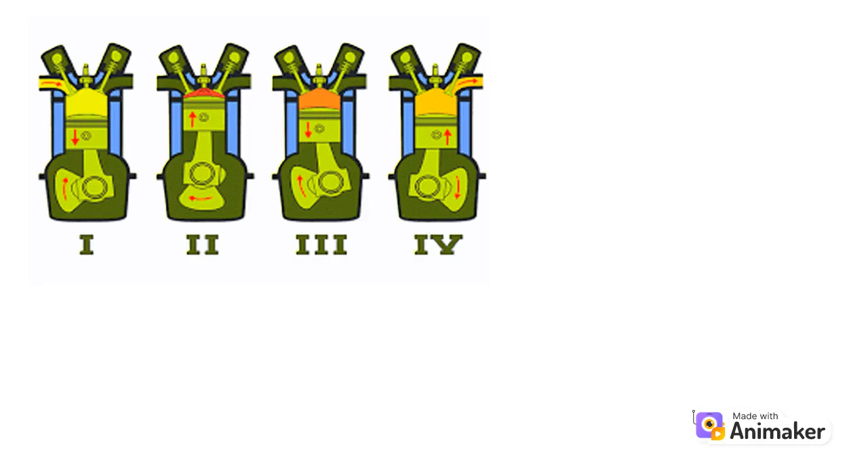Also known as four-cycle, this is an internal combustion engine in which the piston completes four separate strokes, which comprise a single thermodynamic cycle. A stroke refers to the full travel of the piston along the cylinder in either direction. The four separate strokes are termed intake, compression, power, and exhaust.

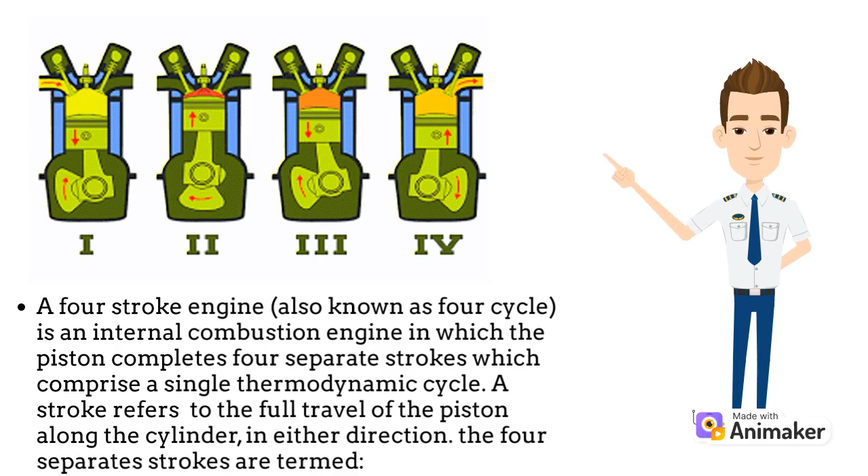The intake stroke of the piston begins at top dead center. The piston descends from the top of the cylinder to the bottom, increasing the volume of the cylinder. A mixture of fuel and air is forced by atmospheric or greater pressure into the cylinder through the intake port.

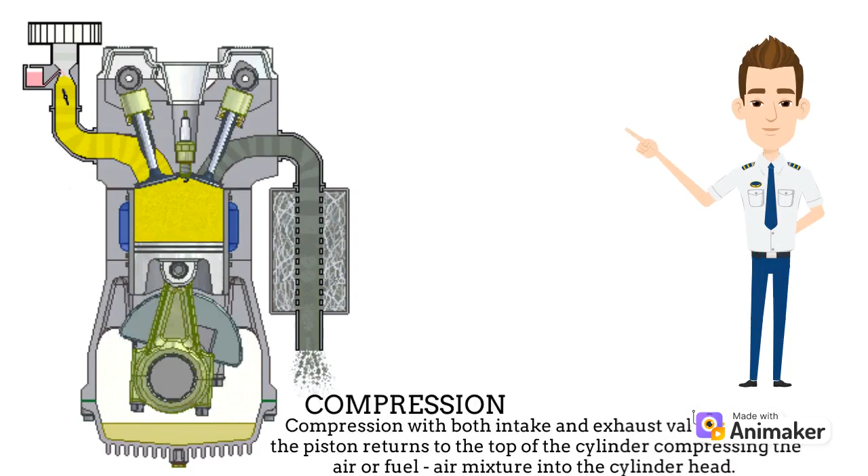Compression: with both intake and exhaust valves closed, the piston returns to the top of the cylinder, compressing the air-fuel mixture into the cylinder head.

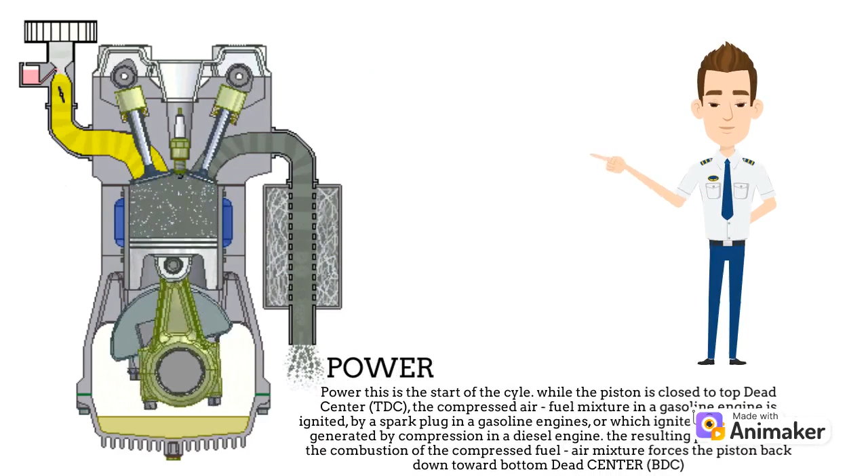Power: this is the start of the second revolution of the cycle. While the piston is close to top dead center (TDC), the compressed air-fuel mixture in a gasoline engine is ignited by a spark plug, or ignites due to the heat generated by compression in a diesel engine. The resulting pressure from combustion of the compressed fuel-air mixture forces the piston back down toward bottom dead center (BDC).

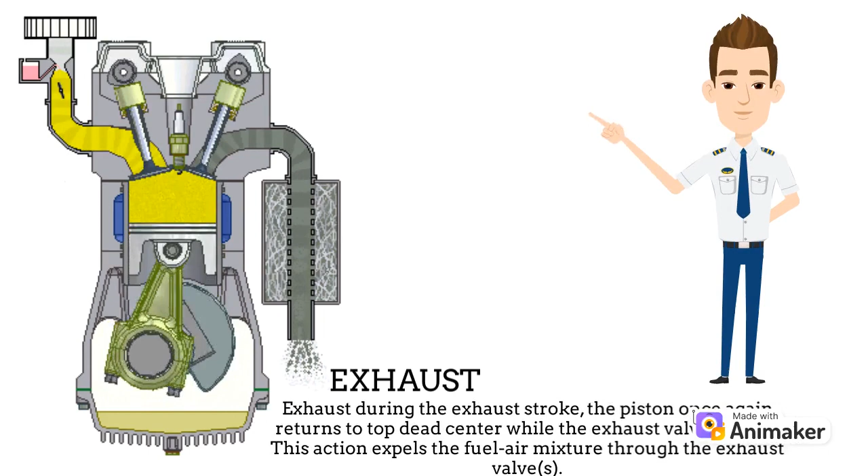Exhaust: during the exhaust stroke, the piston once again returns to top dead center while the exhaust valve is open. This action expels the spent fuel-air mixture through the exhaust valves.

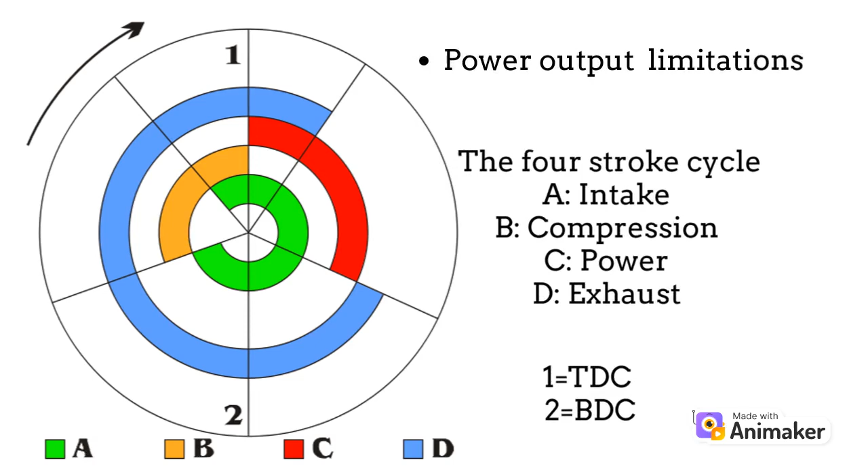Power output limitations. The four-stroke cycle: A intake, B compression, C power, D exhaust. The maximum amount of power generated by an engine is determined by the maximum amount of air ingested.

The amount of power generated by a piston engine is related to its size, cylinder volume, whether it is a two-stroke or four-stroke design, volumetric efficiency losses, air-to-fuel ratio, the calorific value of the fuel, oxygen content of the air, and speed (RPM). The speed is ultimately limited by material strength and lubrication.

Valves, pistons and connecting rods suffer severe acceleration forces. At high engine speed, physical breakage and piston ring flutter can occur, resulting in power loss or even engine destruction.

Piston ring flutter occurs when rings oscillate vertically within the piston grooves they reside in. Ring flutter compromises the seal between the ring and the cylinder wall, which causes a loss of cylinder pressure and power if an engine spins too quickly.

Valve springs cannot act quickly enough to close the valves. This is commonly referred to as valve float, and it can result in piston-to-valve contact, severely damaging the engine. At high speeds, the lubrication of the piston-cylinder wall interface tends to break down, which limits piston speed for industrial engines to about 10 meters per second.

Intake and exhaust port flow: the output power of an engine is dependent on the ability of the intake air-fuel mixture and exhaust matter to move quickly through the valve ports, typically located in the cylinder head.

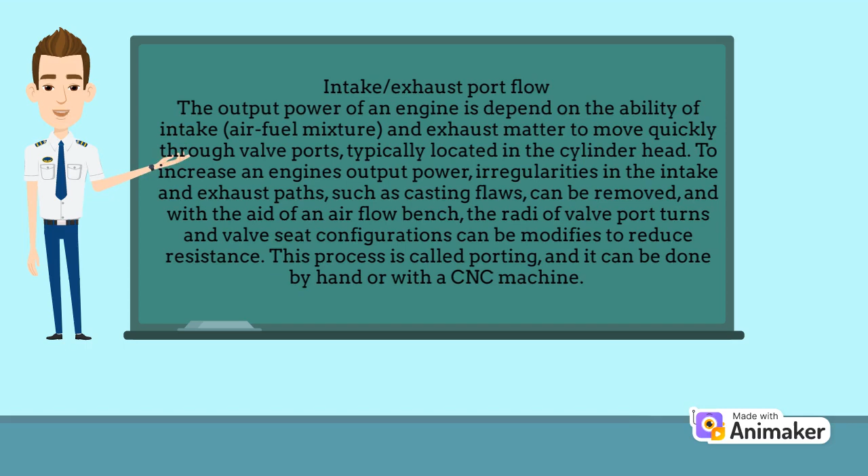To increase an engine's output power, irregularities in the intake and exhaust paths, such as casting flaws, can be removed. With the aid of an airflow bench, the radii, valve port turns, and valve seat configuration can be modified to reduce resistance. This process is called porting, and it can be done by hand or with a CNC machine.

Supercharging: one way to increase engine power is to force more air into the cylinder so that more power can be produced from each power stroke.

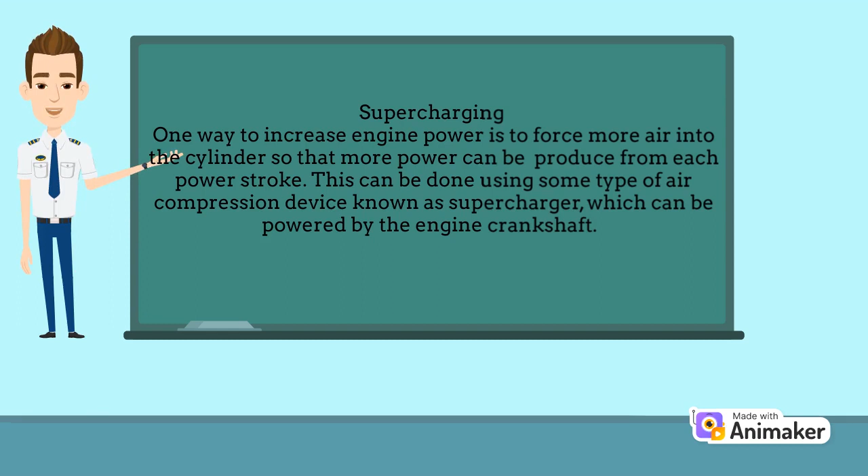This can be done using some type of air compression device known as a supercharger, which can be powered by the engine crankshaft. Supercharging increases the power output limits of an internal combustion engine relative to its displacement.

Most commonly, the supercharger is always running, but there have been designs that allow it to be cut out or run at varying speeds relative to engine speed.

Mechanically driven supercharging has the disadvantage that some of the output power is used to drive the supercharger, while power is wasted in the high-pressure exhaust, as the air has been compressed twice and gains more potential volume in the combustion, but it is only expanded in one stage.

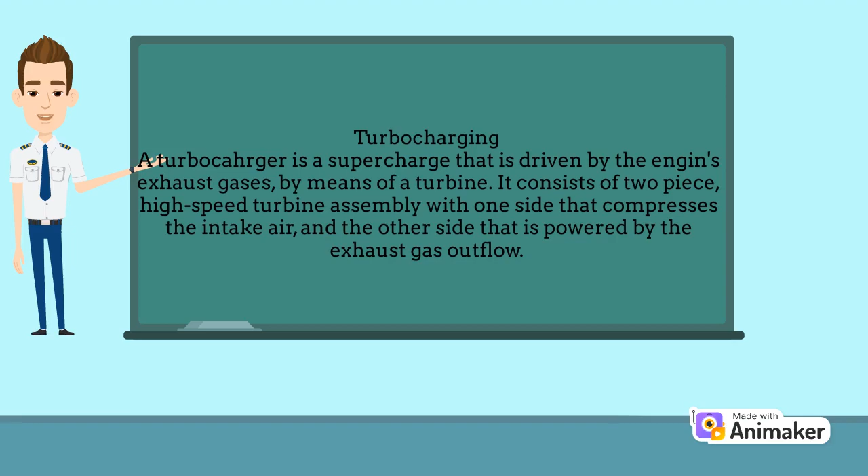Turbocharging: a turbocharger is a supercharger that is driven by the engine's exhaust gases by means of a turbine. It consists of a two-piece, high-speed turbine assembly, with one side compressing the intake air and the other side powered by the exhaust gas outflow.

When idling, and at low to moderate speeds, the turbine produces little power from the small exhaust volume. The turbocharger has little effect, and the engine operates nearly in a naturally aspirated manner.

When much more power output is required, the engine speed and throttle opening are increased until the exhaust gases are sufficient to spin up the turbocharger's turbine, starting to compress much more air than normal into the intake manifold.

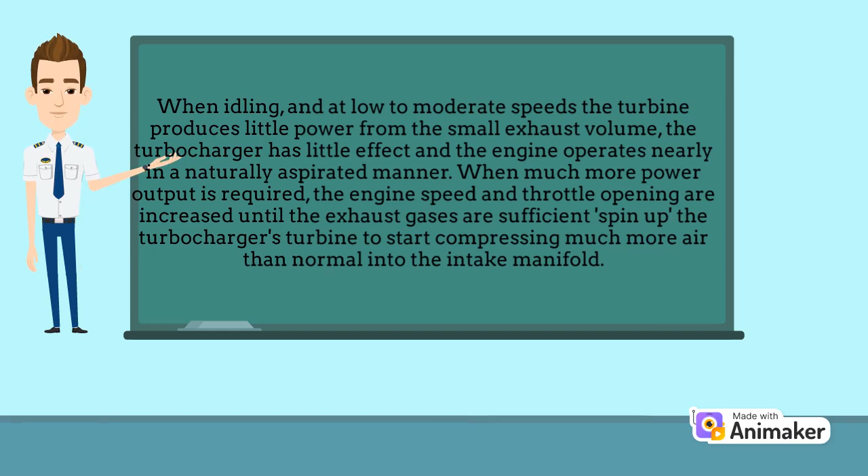Turbocharging allows for more efficient engine operation because it is driven by exhaust pressure that would otherwise be mostly wasted. But there is a design limitation known as turbo lag.

The increased engine power is not immediately available due to the need to sharply increase engine RPM, to build up pressure and to spin up the turbo, before the turbo starts to do any useful work. Increased exhaust spins the turbo faster, and so forth until steady high power operation is reached.

Another difficulty is the higher exhaust pressure causes the exhaust gas to transfer more of its heat to the mechanical parts of the engine.

Rod and piston to stroke ratio. The rod to stroke is the ratio of the connecting rod to the length of the piston stroke. A longer rod reduces sidewise pressure of the piston on the cylinder wall and the stress forces, increasing engine life. It also increases the cost and the engine height and weight.

An engine where the bore diameter is equal to its stroke length is a square engine. An engine where the bore diameter is larger than its stroke length is an over-square engine. Conversely, an engine with a bore diameter that is smaller than its stroke length is an under-square engine.

Valve train. The valve train is typically operated by a camshaft rotating at half the speed of the crankshaft. It has a series of cams along its length, each designed to open a valve during the appropriate part of an intake or exhaust stroke.

A tappet between valve and cam is a contact surface on which the cam slides to open the valve. Many engines use one or more camshafts above a row or each row of cylinders, as in the illustration, in which each cam directly actuates a valve through a flat tappet.

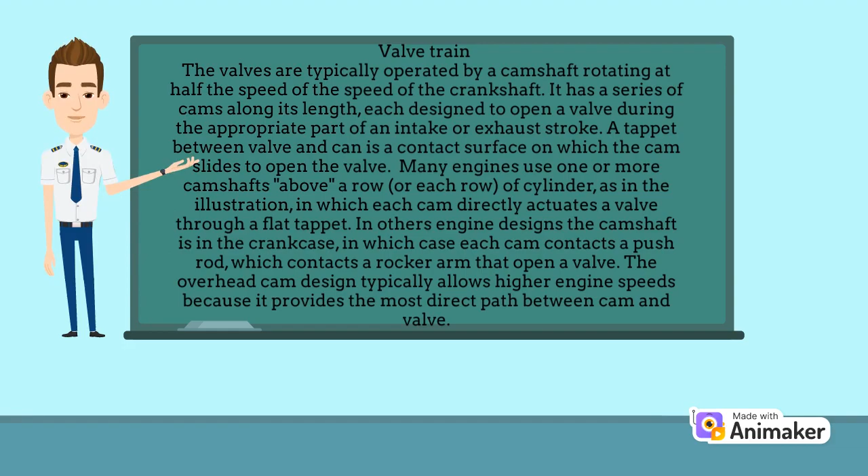In other engine designs, a camshaft sits in the crankcase, in which case each cam contacts a push rod, which contacts a rocker arm that opens a valve. The overhead cam design typically allows higher engine speeds because it provides the most direct path between cam and valve.

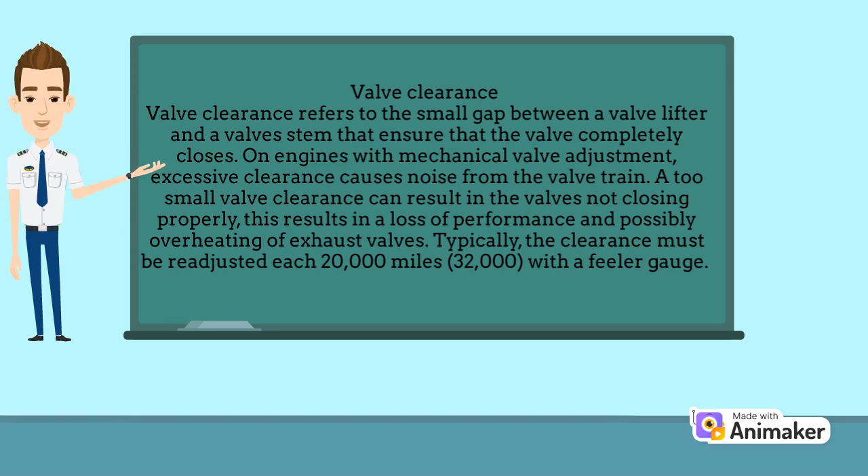Valve clearance refers to the small gap between a valve lifter and a valve stem that ensures that the valve completely closes. On engines with mechanical valve adjustment, excessive clearance causes noise from the valve train. A too small valve clearance can result in the valves not closing properly. This results in a loss of performance and possibly overheating of exhaust valves. Typically, the clearance must be readjusted each 20,000 miles, or 32,000 kilometers, with a feeler gauge.

Most modern production engines use hydraulic lifters to automatically compensate for valve train component wear. Dirty engine oil may cause lifter failure.

Energy balance. Otto engines are about 30% efficient. In other words, 30% of the energy generated by combustion is converted into useful rotational energy at the output shaft of the engine, while the remainder is lost due to waste heat, friction and engine accessories.

There are a number of ways to recover some of the energy lost to waste heat. Use of a turbocharger, as in diesel engines, is very effective by boosting incoming air pressure and in effect provides the same increase in performance as having more displacement.

The Mack Truck Company, decades ago, developed a turbine system that converted waste heat into kinetic energy that it fed back into the engine's transmission.

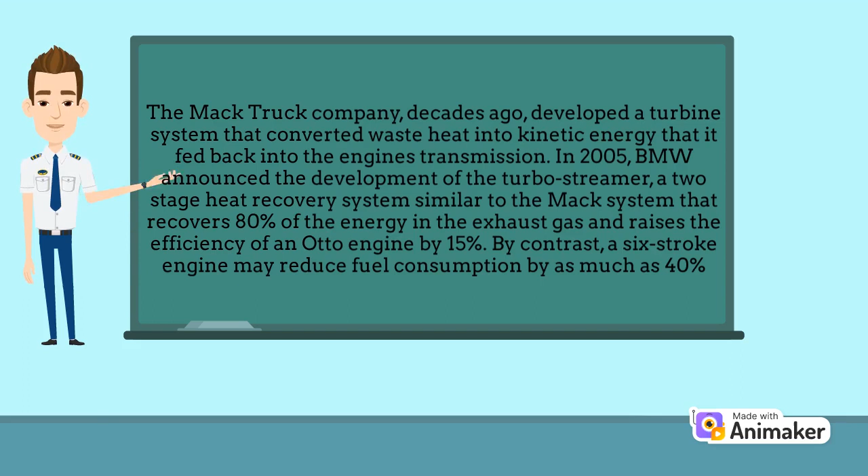In 2005, BMW announced the development of the Turbo Steamer, a two-stage heat recovery system similar to the Mack system, that recovered 80% of the energy in the exhaust gas and raises the efficiency of an Otto engine by 15%. By contrast, a six-stroke engine may reduce fuel consumption by as much as 40%.

Modern engines are often intentionally built to be slightly less efficient than they could otherwise be. This is necessary for emission control such as exhaust gas recirculation and catalytic converters that reduce smog and other atmospheric pollutants. Reductions in efficiency may be counteracted with an engine control unit using lean burn techniques.

In the United States, the corporate average fuel economy mandates that vehicles must achieve an average of 35.5 miles per gallon (mpg), compared to the current standard of 25 miles per gallon.

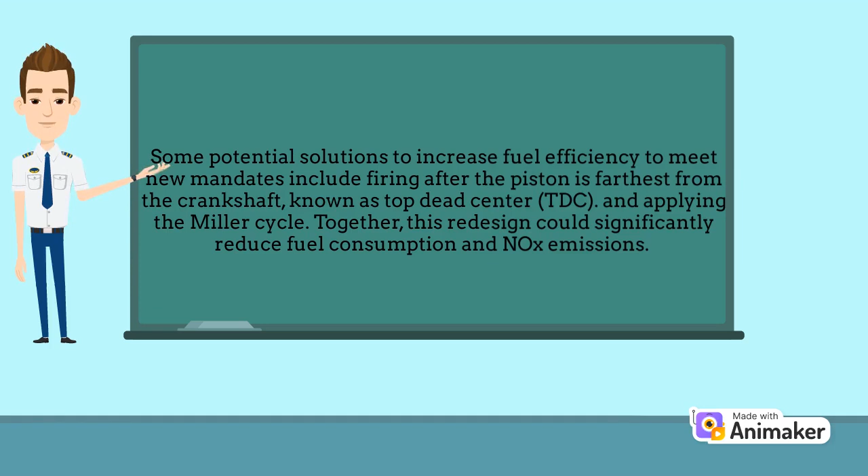As automakers look to meet these standards by 2016, new ways of engineering the traditional internal combustion engine (ICE) may have to be considered. Some potential solutions to increase fuel efficiency to meet new mandates include firing after the piston is farthest from the crankshaft, known as top dead center (TDC), and applying the Miller cycle. Together, this redesign could significantly reduce fuel consumption and NOx emissions.